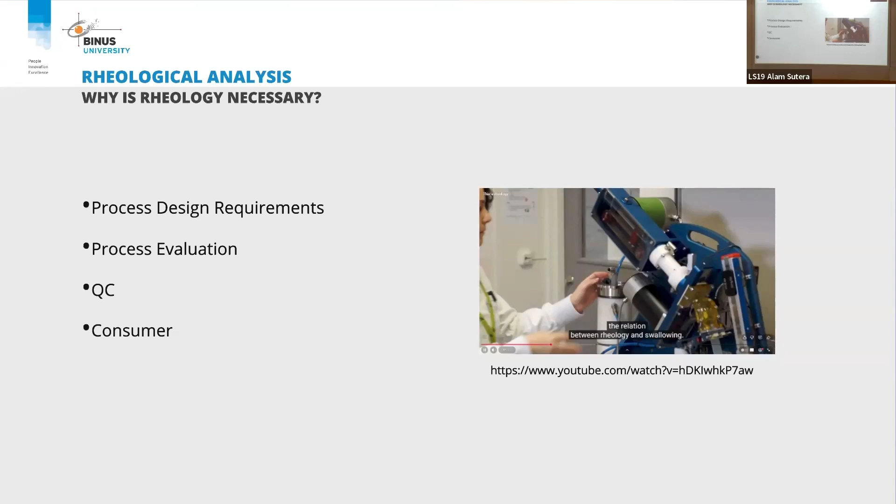So I want to ask you a question here. Today we'll learn about rheology. Why is rheology necessary? Why is rheology important? Anyone can elaborate what is the necessity of rheology in process design? Anyone? Azaria, maybe? Why is rheology necessary in process design? Today's topic - so these are the learning outcomes. However, the session outcome is: by the end of the session, you will be able to analyze the rheology characteristics of fluids in the food manufacturing process.

You need to scan this chart, and then fill in number 1 and number 2. So please fill in number 1 and number 2 question. There's no true or false answer, you only need to fill in. So I expect there will be 23 responses, only number 1 and number 2.

Okay, so I think we can go through the results. There are 18 responses. For question number 1, what do you already know about food rheology? Some answered that it is kind of a study about food flow - a branch of science that studies how food material flows and deforms, how it flows and changes in shape.

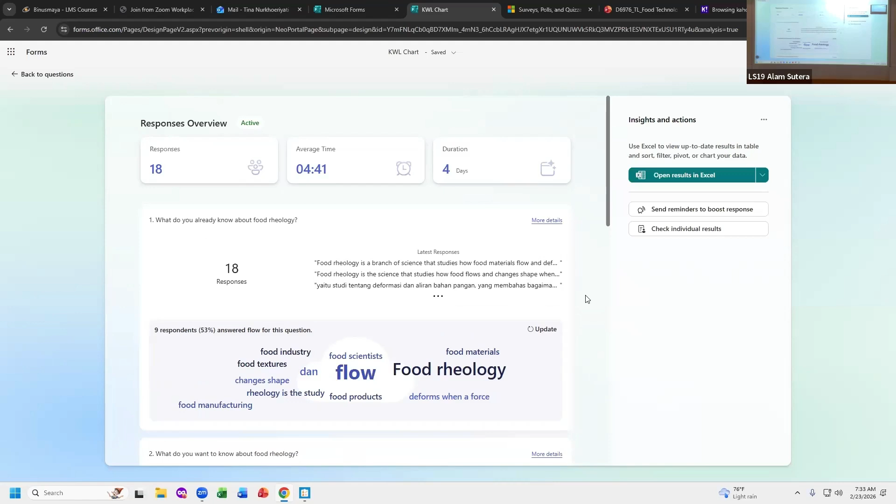And then for question number 2: I would want to understand how food structure is at the micro and molecular level, and know how to measure the viscosity and texture of food. Thank you for your responses.

So, the topics and subtopics today are introduction and then deformation. Some of you answered about what rheology is, and answered it's about food deformation. What is deformation? It is the changes of form. And then we'll also learn about shear stress and strain, shear rate, and viscosity.

Some of you also answered rheology is related with viscosity, and then types of fluid flow. And then last is about rheology model.

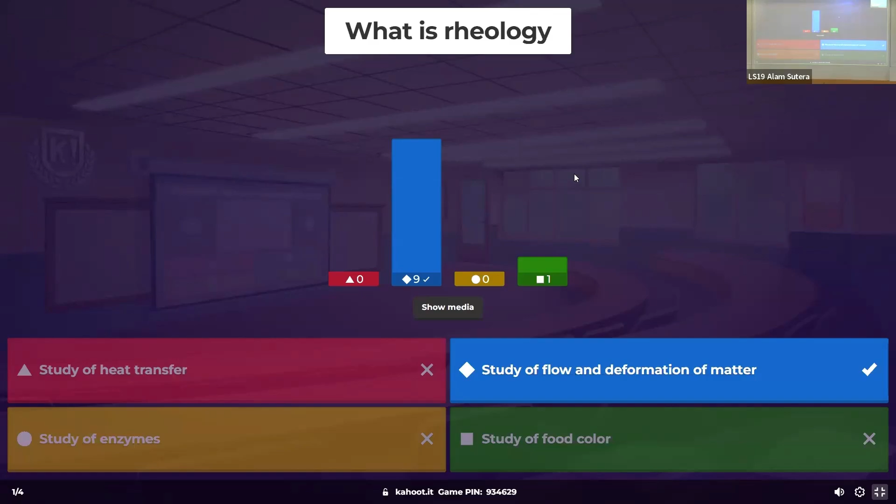What is rheology? It's the study of flow and deformation of matter. A Newtonian fluid has a constant viscosity at all shear rates. Shear stress is defined as force per unit area. Remember what is force per unit area? Anyone remember our general physics lesson? What is force per unit area? Force per unit area equals pressure.

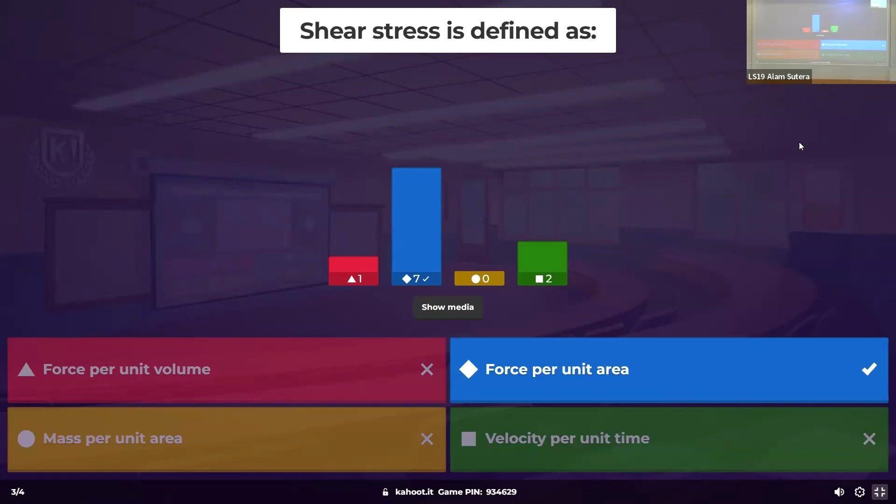Unit of viscosity in CGS system: centimeter, gram, second system - it's poise. So what is the unit of viscosity in SI system? Pascal second. In CGS system, it's poise.

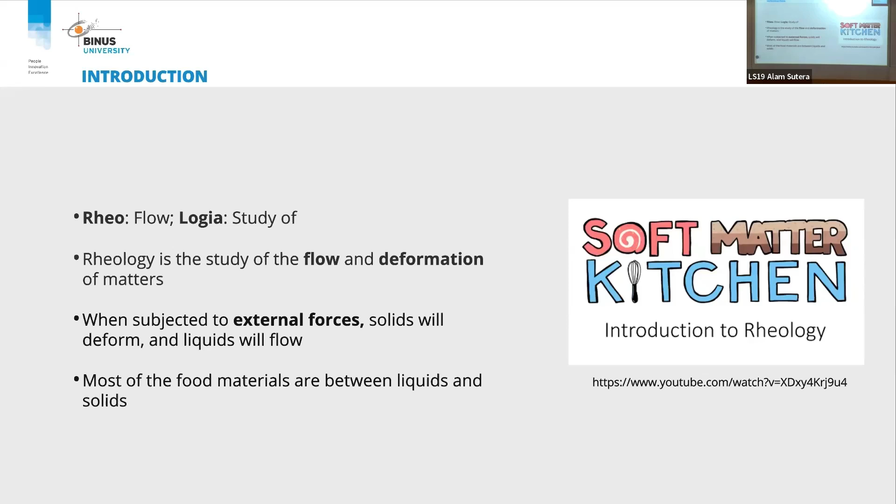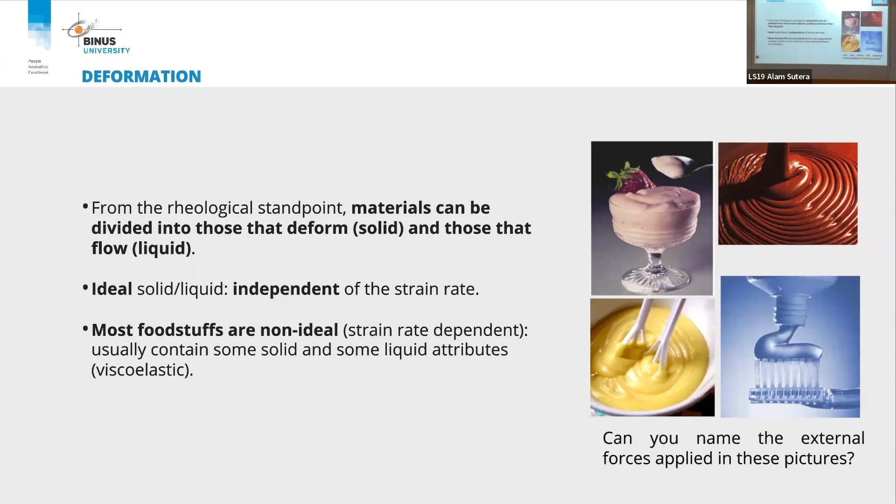Rheology is the study of the flow and deformation of matters. When subjected to external forces, solids will deform and liquids will flow. But most food materials are between liquids and solids. So from the rheological standpoint, materials can be divided into those that deform and those that flow. We know about the ideal solid or liquid, which are independent of the strain rate. However, most foodstuffs are not ideal - they contain some solid and some liquid attributes. In other words, they are viscoelastic.

Now we need to learn about some terms in rheology. First is stress. I think we often mention stress in our daily life. Stress is the intensity of the force component acting on a body, expressed as force per unit area of the food. So stress is a force component acting on a body, expressed as force per surface area of the food.

So we know there's a stress here, which is perpendicular to the surface. This is stress, okay, so it's perpendicular to the surface. What if the stress is parallel with the surface? So stress is pressure that is perpendicular with the surface of the food. And what is the force or pressure that's parallel with the surface? We call it shear. This one is normal, this one is shear stress. So if the stress is perpendicular with the surface, then it's called normal stress. Remember in general physics, we also learned about normal force, which is perpendicular to the surface. If the force is parallel with the surface, then we call it shear.

Next is about strain. Strain is the change in size or shape of a body in response to an applied stress. So strain is the deformation, or the change in shape or size of a body or food due to external forces. And then there's another term - strain rate. Strain rate is the time derivative of strain, so strain per unit of time.

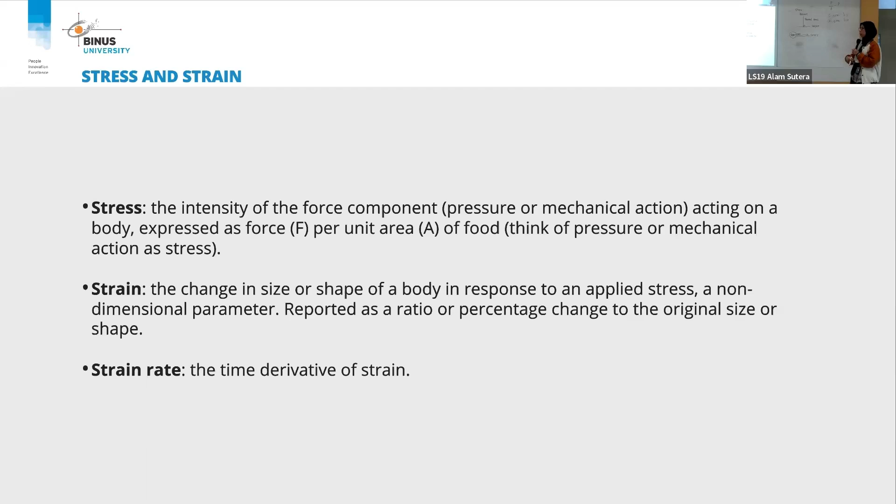Now we'll see more deeply about shear stress and strain. Imagine there's a solid food with a cube shape here, and some external force which is parallel with the surface acting on this food. So it is parallel with the surface - is it shear stress or normal stress? Shear. So there's shear stress acting on this solid food, and the shear stress can be quantified by calculating the amount of force per surface area. The unit of force is Newton, and the unit of surface area is square meter. Newton over square meter is the same as Pascal.

Now we learn about shear strain. Shear strain is the ratio of du over L. So du is the changes of the length of the food. Initially the food stands straight like this, and then a shear stress is applied, so this food becomes deformed. Imagine this food is stuck to two surfaces, and the upper surface is pulled to the right direction, but the lower part stands still. The changes of the length over the thickness of the cube gives us the shear strain. For a very small deformation, for example, this angle is very small, then tangent gamma equals gamma - so we assume the deformation is very small.

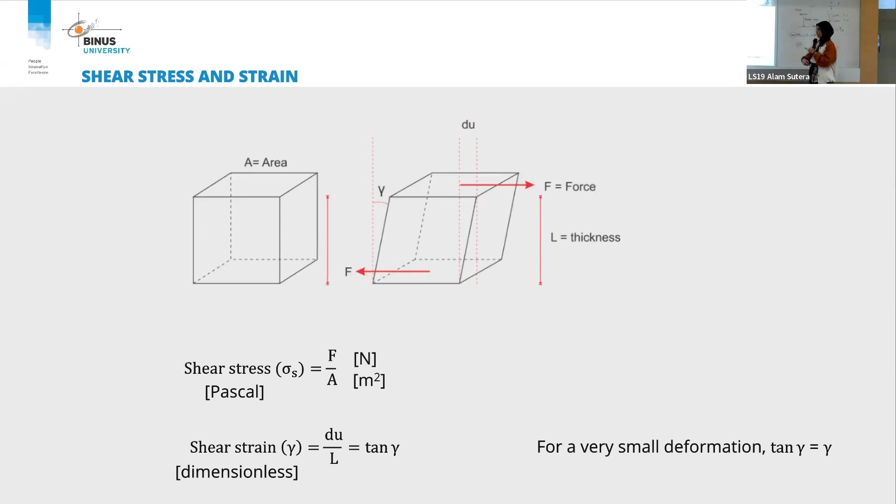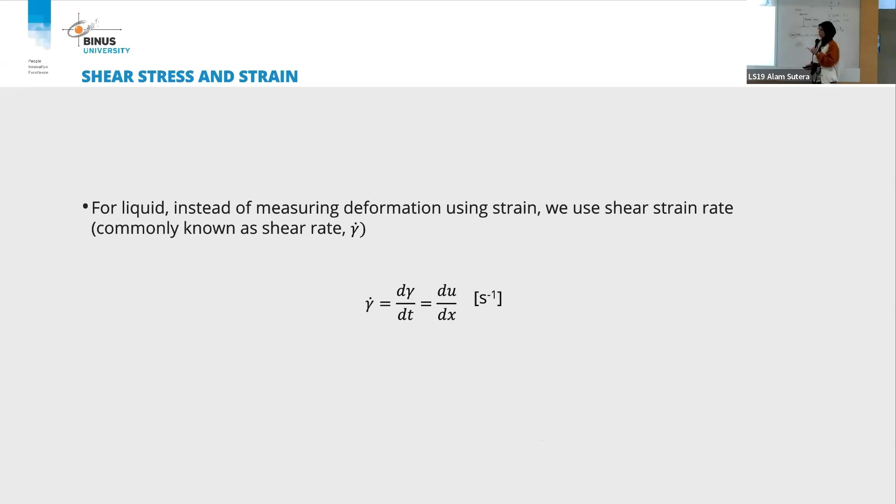So for solid, we use shear stress or shear strain, but for liquid, we use shear rate or gamma dot. For solid, the gamma is without the dot, but for liquid, the shear rate uses gamma with the dot.

Now about shear stress. Shear stress is notated as sigma. Sigma is force over area — the force which is parallel to its surface, over the surface area of the fluid.

For liquid, we imagine that liquid is like a deck of cards. Shear rate or gamma dot equals the velocity of the liquid layer, the top layer, over the distance between the plates. So between these cards or plates, there's a distance. Shear rate or gamma dot equals velocity over distance between plates.

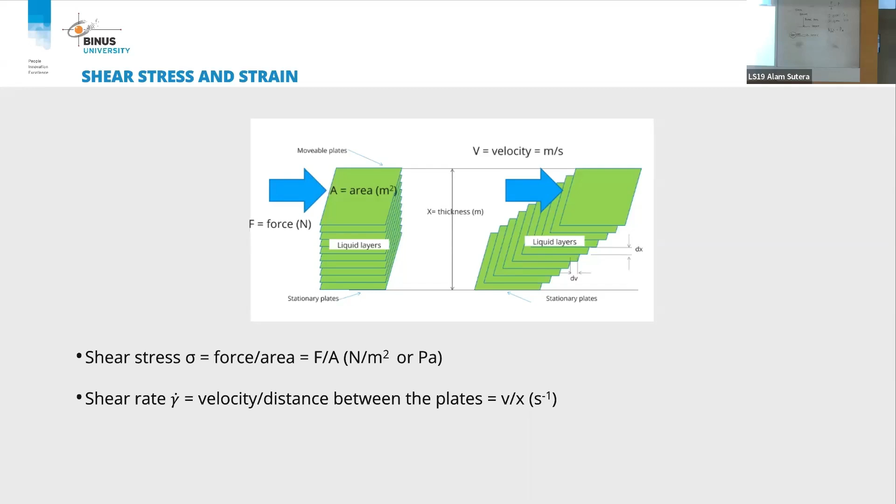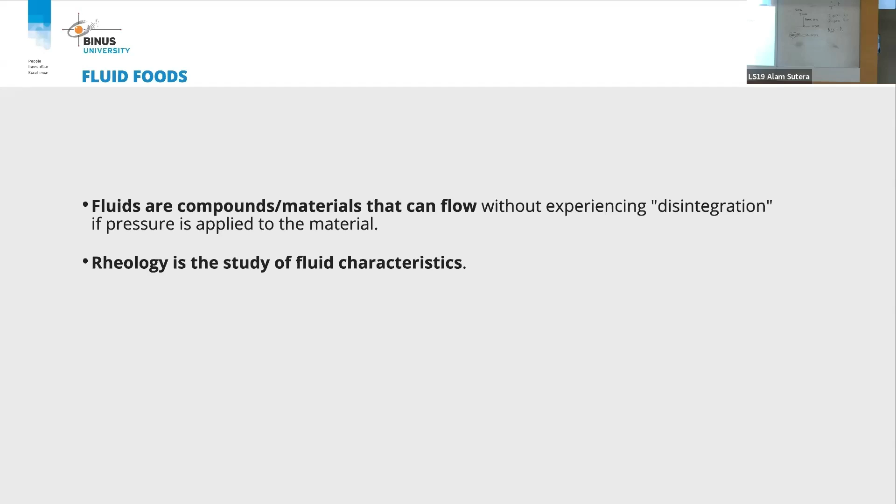Fluids are compounds or materials that can flow without experiencing disintegration between the particles, if pressure is applied to the material. Rheology is the study of fluid characteristics. Now next we will discuss viscosity.

Imagine there are two circles, the inner circle and the outer circle. The inner circle is yellow, the outer circle is pink. Now we zoom in on this part — this is the inner cylinder and this is the outer cylinder. Imagine these circles are dipped in liquid.

Between the outer cylinder and inner cylinder there are liquids, and the outer cylinder is moving. Imagine these liquids like a deck of cards. When the top card has force applied on it, it will move, and the immediate layer below it will also move to some extent. The inner cylinder has zero velocity, and the outer cylinder has a certain velocity.

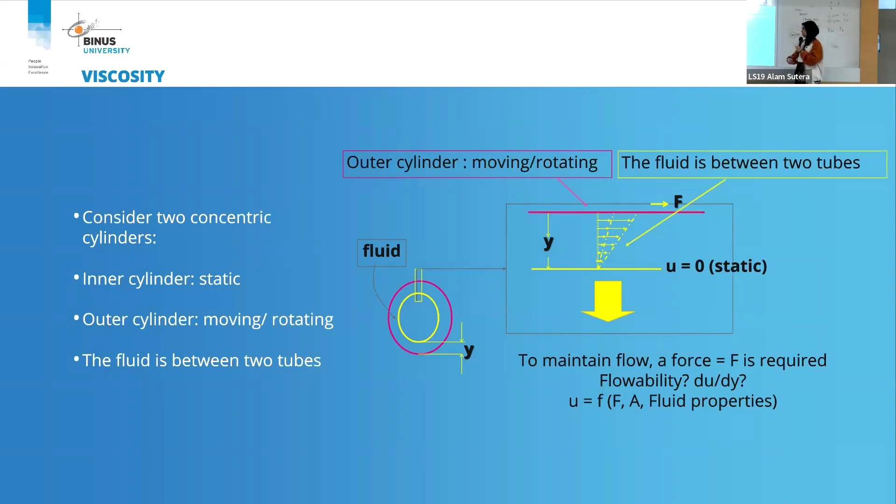So what is viscosity? Viscosity is the property of a material which describes the resistance to flow. You can imagine some types of liquid, for example honey. Honey and water — which one has more resistance to flow, honey or water? Honey. So we say honey has higher viscosity than water because honey has resistance to flow higher than water.

Shear stress equals viscosity times shear rate. Shear stress is equivalent to shear rate; to turn this equivalence into an equals sign, we need a constant. That constant is viscosity. So shear stress equals viscosity times shear rate.

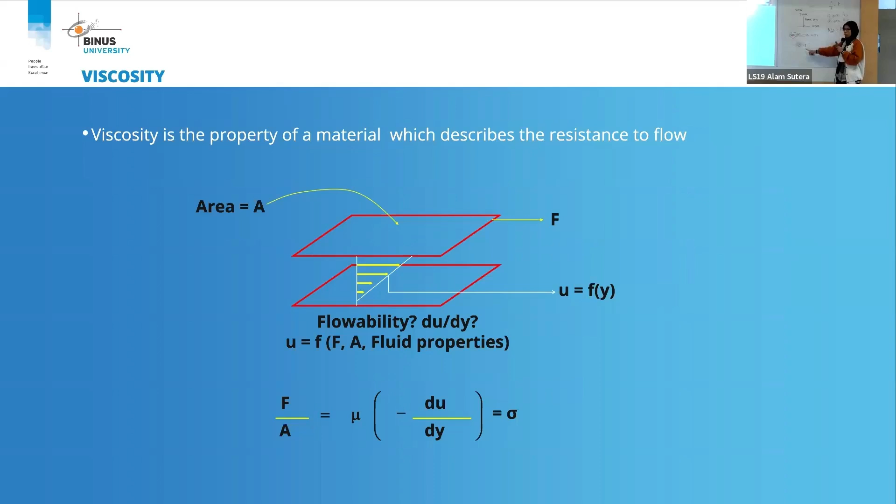In SI system, shear stress has a unit of Newton over square meter, or Pascal. In CGS system, 1 Pascal equals 10 dyne over square centimeter. Shear stress has a unit of Pascal, and shear rate has a unit of 1 over second, or second to the power of minus 1. So the unit of viscosity in SI system is Pascal times second, or kilogram over meter second. In CGS system, the viscosity unit is poise or centipoise.

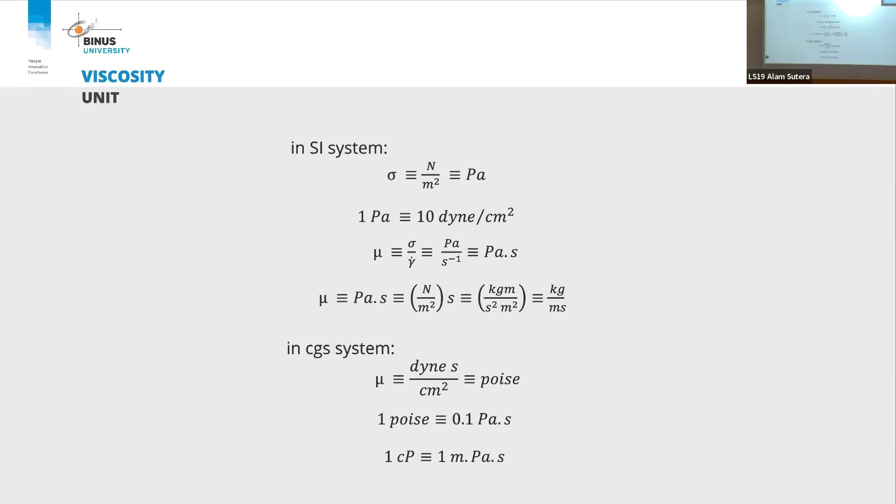I think you can recall the viscosity module from general physics. You did measure viscosity using an instrument — on Wednesday lab, you will use this kind of instrument, which is more accurate than the Ostwald viscometer.

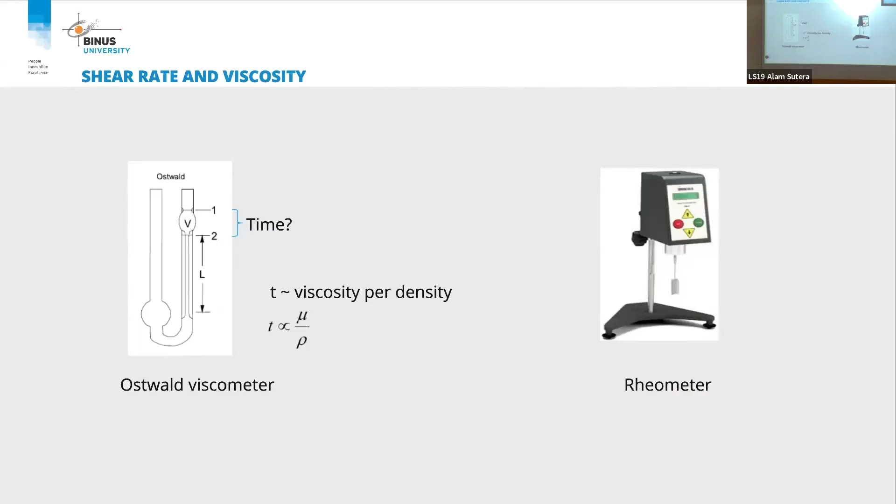Now shear rate and viscosity: viscosity equals shear stress over shear rate. So how do we measure viscosity using a rheometer?

You will use different diameters and shapes of spindles. This one is the spindle; they are usually numbered 1, 2, 3, etc.

Remember the previous slide where there's an inner cylinder and outer cylinder. This is your beaker — the outer cylinder — and the spindle of the equipment is the inner cylinder. The spindle will rotate, so the liquid immediately in contact with the spindle will move. Imagine a deck of cards: the card that contacts the spindle will move, and the immediate layer afterward will also move to some extent.

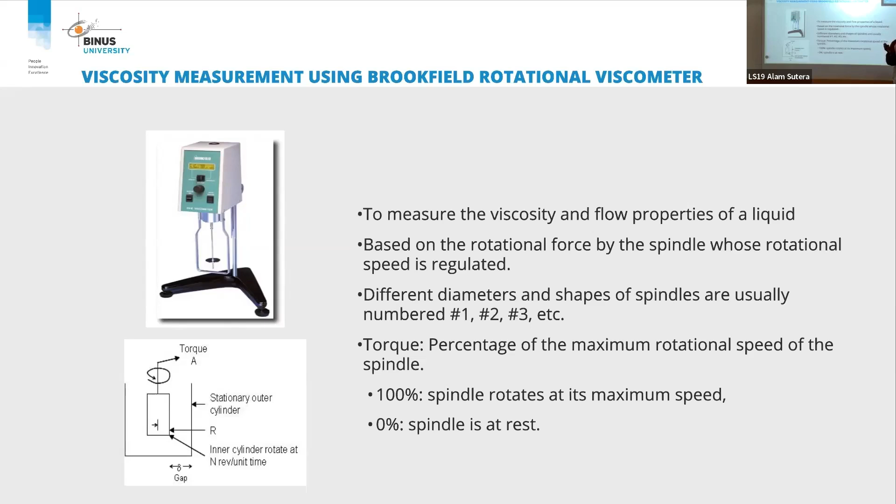This is an example of results. The rotation speed is in RPM. You will apply three kinds of RPMs, and then you will read the reading.

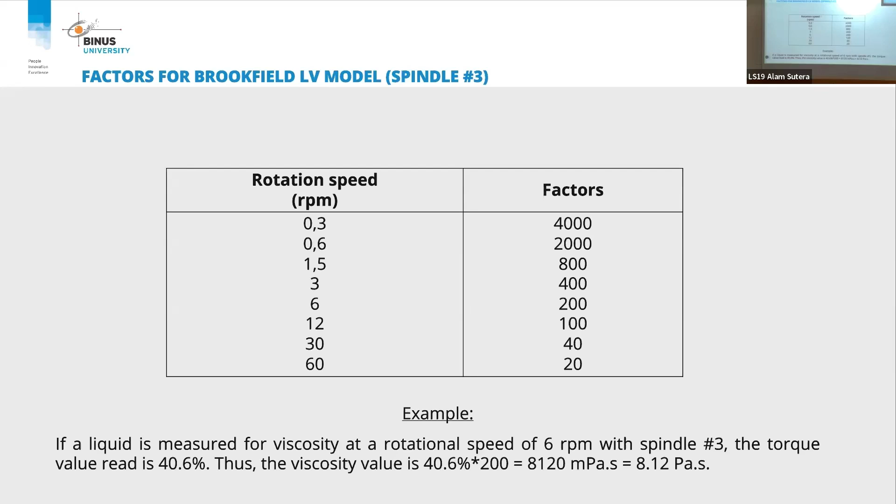For example, if a liquid is measured for viscosity at a rotational speed of 6 RPM with spindle number 3, the torque value read is 40.6%. Thus, the viscosity value is 40.6% times 200, since the corresponding factor for 6 RPM is 200. You need to multiply the percentage of the spindle with the factor corresponding to the RPM. 40.6% times 200 equals 8,120 millipascal second, or 8.12 pascal second.

Types of fluid are differentiated based on their dependence on time. They are time-independent fluid flow and time-dependent fluid flow. We will discuss time-independent fluid flows. This is further differentiated into non-Newtonian and Newtonian.

Remember, in the quiz, Newtonian is the fluid where the viscosity is constant. Non-Newtonian and Newtonian. This non-Newtonian category is also divided into shear thinning and shear thickening, covering Newtonian fluids and non-Newtonian fluids, which are time independent.

So this graph, what is the x-axis? Newtonian fluid has a constant viscosity, no matter the shear rate or shear stress applied. Viscosity is the gradient of the plot between shear rate and shear stress.

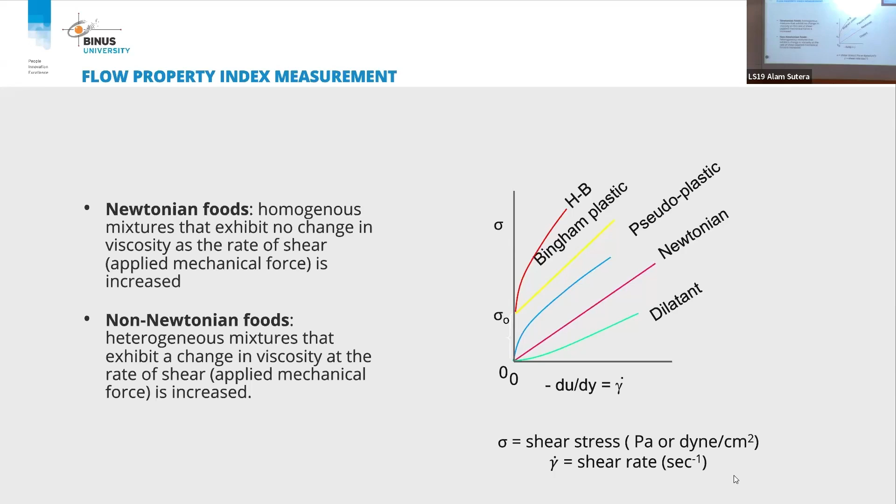Newtonian is like fruit juice, for example apple juice. But processing can change the type of fluid flow. For example, apple juice is Newtonian, but when concentrated it can become dilatant or maybe pseudoplastic - processing influences the fluid flow. Pseudoplastic is like salad dressing, cream, puree, whipped cream, margarine. Bingham plastic is like tomato ketchup.

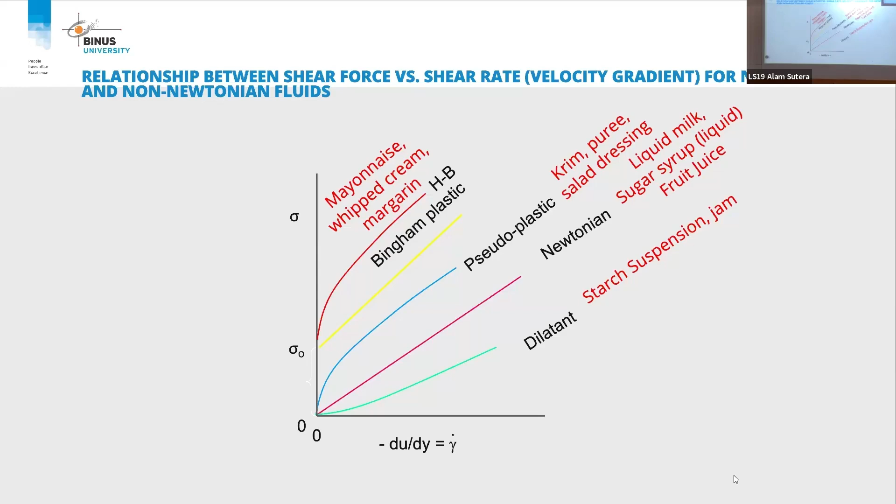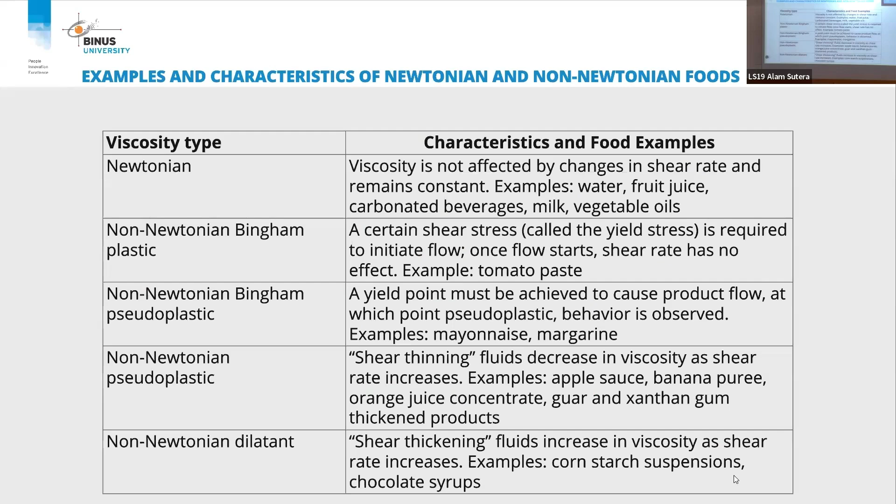So viscosity types include Newtonian, non-Newtonian Bingham plastic, non-Newtonian Bingham pseudoplastic - like the HB mentioned earlier - non-Newtonian pseudoplastic, and non-Newtonian dilatant.

Now we learn about the rheology model. Rheology can be measured. This is the formula of the power law model: sigma equals K times shear rate to the power of N. Sigma equals mu times shear rate - shear stress equals viscosity times shear rate.

What is the difference? This formula applies for Newtonian fluids. For non-Newtonian, we use another model, for example this power law model. Instead of using mu, we use K and n. What is n? n is the flow behavior index and K is the consistency index.

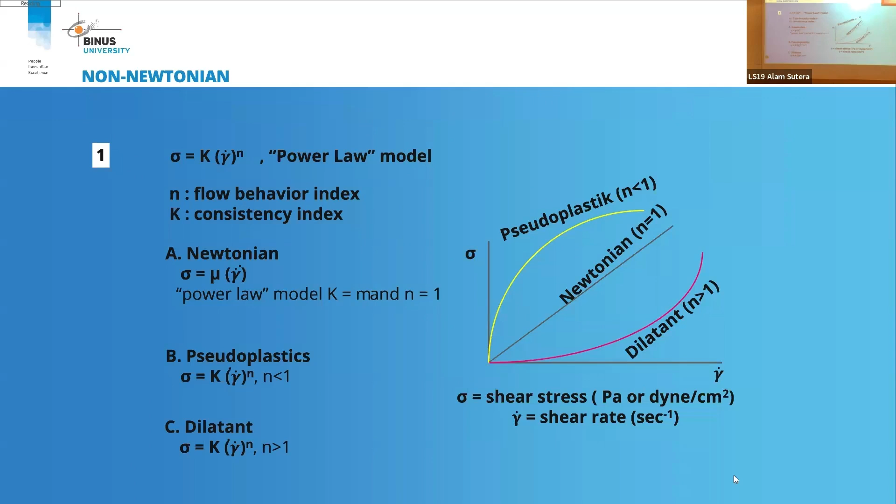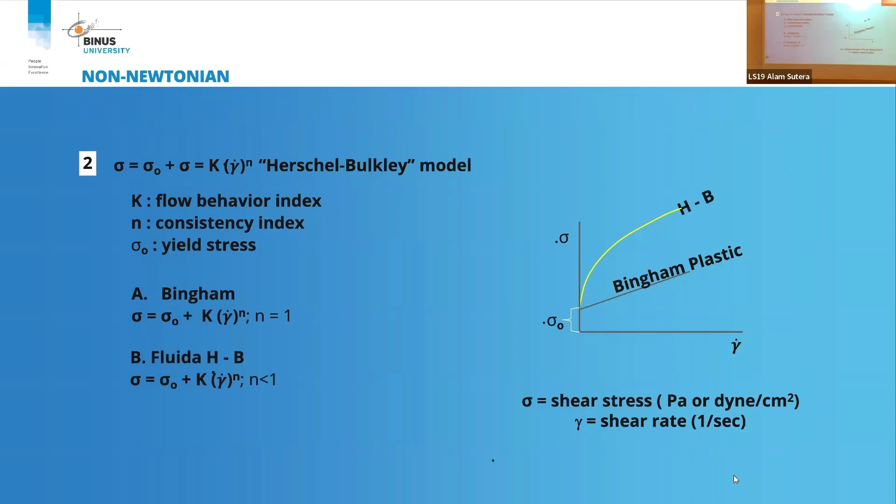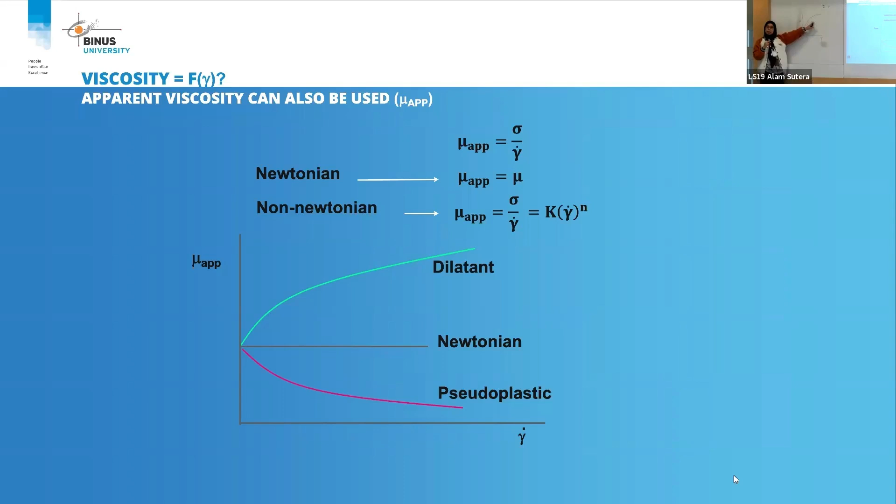Previously we talked about viscosity, but now we'll learn about apparent viscosity. For example, we have a graph of shear stress and shear rate - what kind of liquid is it? What kind of fluid flow is it? Newtonian, dilatant, pseudoplastic, or Bingham plastic.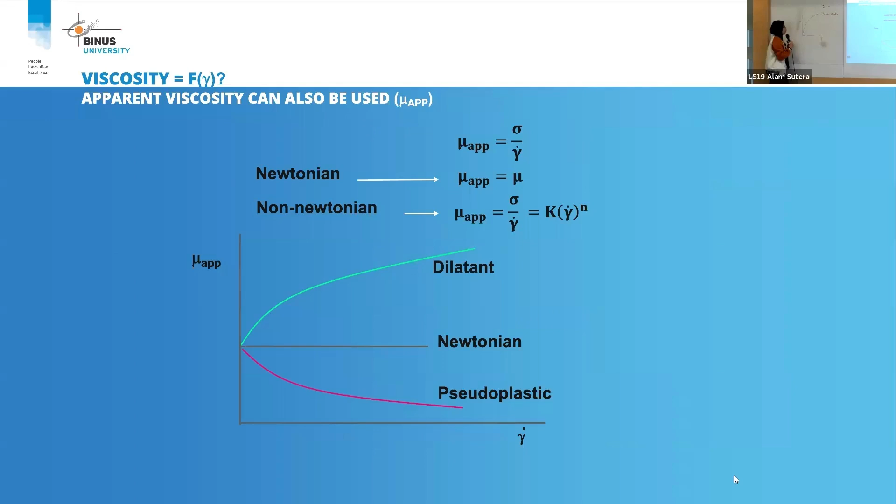At some shear rate point, we draw a line to the origin and do it the same way for other points. This graph shows the relationship between apparent viscosity and shear rate. For dilatant, the apparent viscosity increases along with the increase of shear rate. For pseudoplastic, the viscosity decreases as shear rate increases. But for Newtonian, the viscosity is constant.

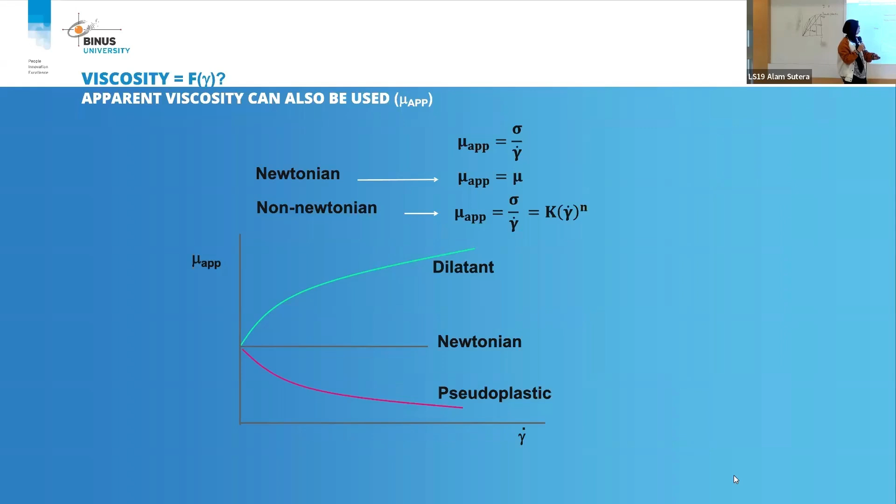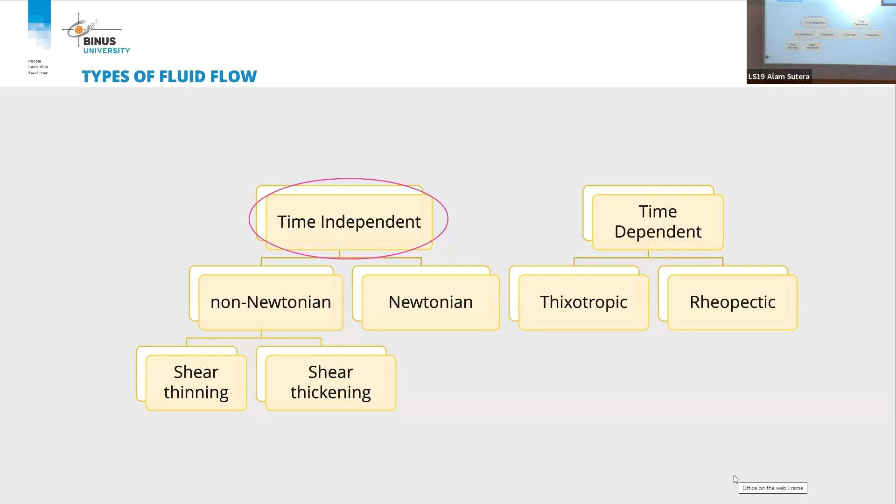How about the relationship between apparent viscosity and time? Remember, there are fluid flows that are time dependent. These could be modeled with several types of equations: exponential, power law, or reciprocal.

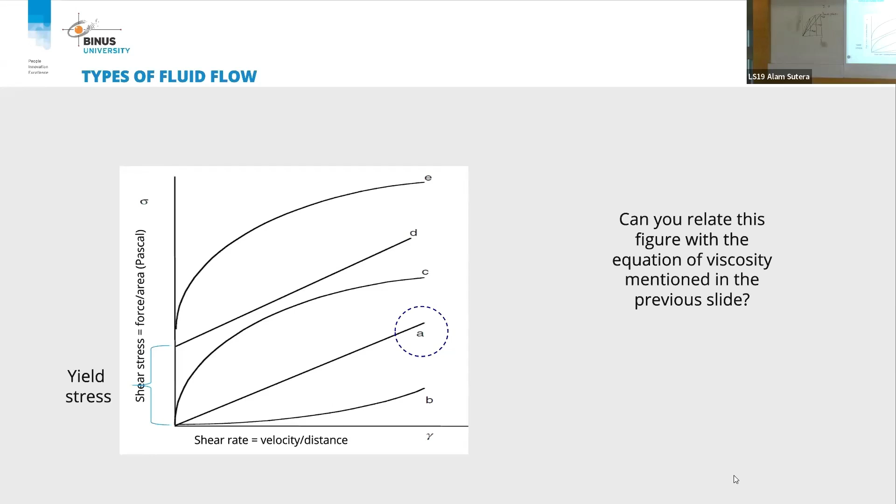This is the formula to find the shear stress, and this is the formula to find the shear rate, in the module. You can find it there.